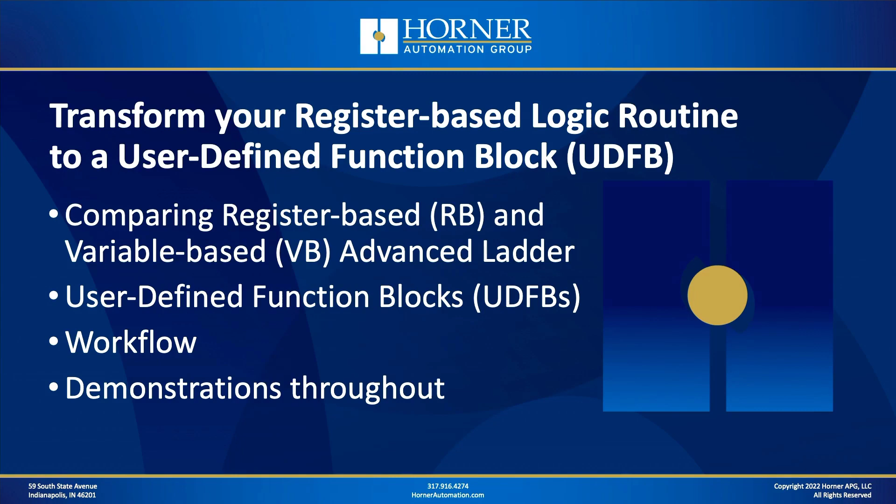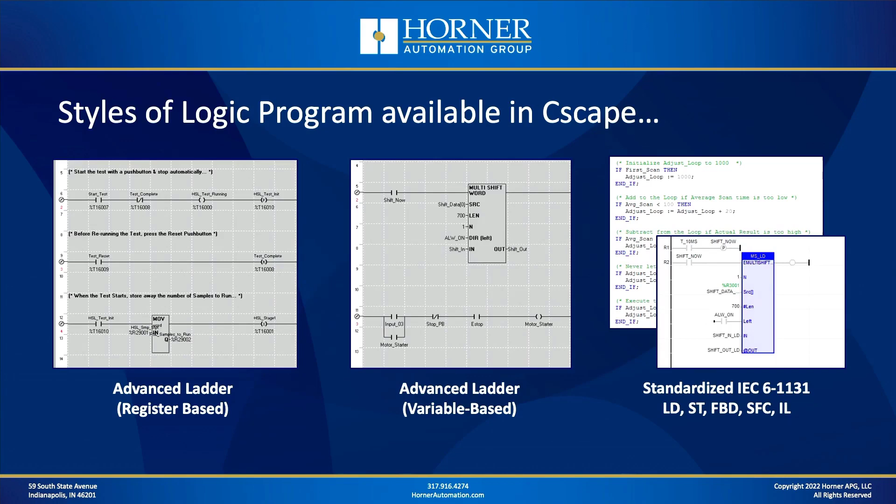In CScape, there are multiple styles of logic programming available. We have a couple different variations on our advanced ladder logic, which is kind of an American-style ladder logic. We've got register-based and we've got variable-based, and we'll compare and contrast those here in a second. But don't forget, we also support the IEC 61131 languages for those of you who prefer IEC 61131, and we've got plenty of videos on this channel showing you how to use IEC 61131. But today we're really honing in on American-style advanced ladder, as we call it. And we're going to really show you how to take some of that register-based logic you wrote before and reuse it again. So let's start with register-based advanced ladder.

Now, register-based advanced ladder was the original logic language available in CScape in 1998. And because of our installed base, it's still the most widely used style of CScape logic today. And we don't have any plans to obsolete it. Even though we're adding more modern options, we're not taking away the classic options that some people, frankly, still prefer.

There are some disadvantages to register-based advanced ladder, however, because with that language, it requires that all variables that you add to your program have to be mapped to a specific memory address in the program. And that makes it more labor-intensive when you are adding variables to your program. It also makes it more labor-intensive when you are replicating code because every time you copy and paste, you have to go into the pasted logic and readdress everything. It also doesn't support some of the newer features like the data structures and the user-defined function blocks, which we're covering today.

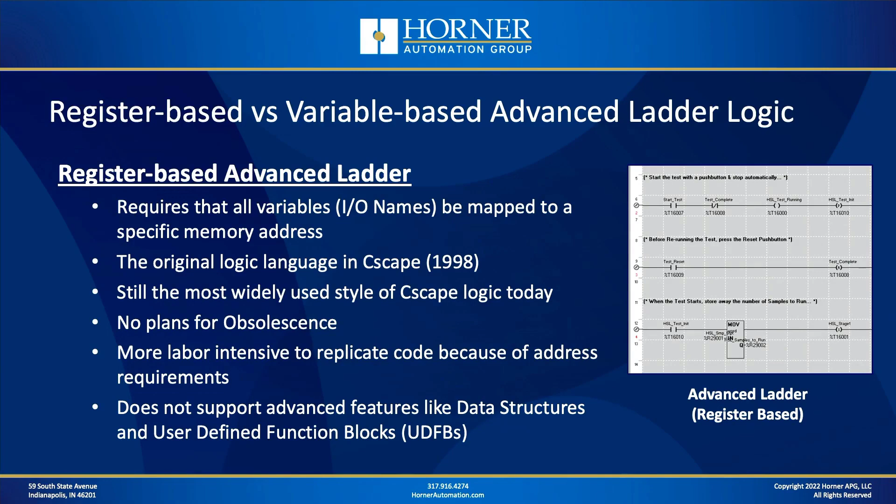Now, with variable-based advanced ladder, you don't have to map all your variables as you add them. You really typically only need to deal with a couple of them, and we'll talk about that here in a few minutes. You do get support for those advanced features. And in our training courses these days, we're teaching both variable-based and register-based kind of in the same course, side by side, if you will. Although in the advanced course, variable-based is pretty much the way that one is taught. And it's certainly the recommended approach for new users that are just getting familiar with CScape. If they're looking to use an American-style ladder logic, we encourage them to use the variable-based version for sure.

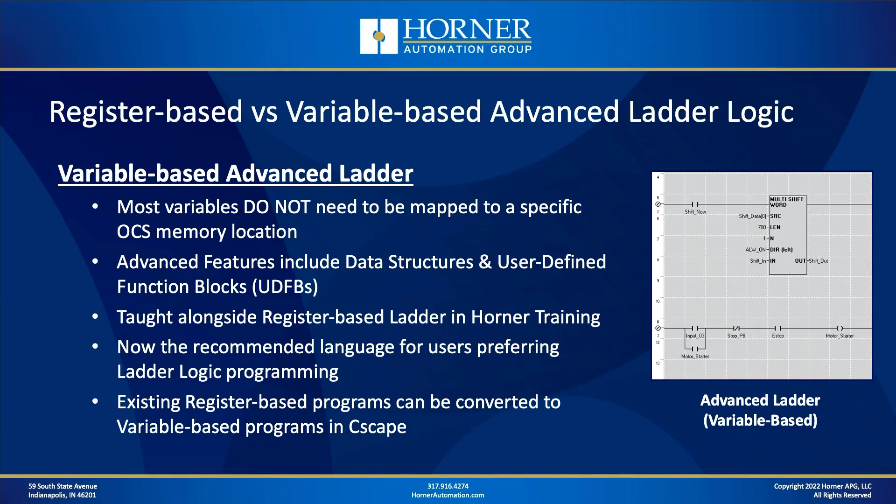But don't worry, if you're someone who's used the register-based for years and you want to reuse that code, entire programs of that code, you can convert your programs from register-based to variable-based. Okay, so there's the compare and contrast between the two. But let's take a quick look at memory mapping between the two, because certainly, like I mentioned a minute ago, with register-based advanced ladder, you have to memory map every single variable as you bring it in.

And with variable-based programming, you don't. Although, if you've got a real-world I/O point and you want to tie a variable to that real-world I/O point, that's a case in which you would memory map. Also, if you're going to send a variable out over a network like Modbus, for instance, you would memory map in that case as well. But those are the exceptions rather than the rule.

Now, the tools are a little bit different between register-based and variable-based when you're creating variables and when you're editing variables. Now, in both cases, you can create variables on the fly, or you can create them in advance. The tools are just a little bit different.

User-defined function blocks, which is what we're going to talk about today. These are sections of code that you can take and modularize and turn them into a function block that you can call similar to a subroutine, but really more like a function block. That's why it's called a user-defined function block. Unlike subroutines, with UDFBs, you can have multiple instances in the same program.

If you're using a subroutine, which are highly useful, you're going to have one copy of a given subroutine, and you can only call that subroutine once at a time. And it can't have multiple sections of code calling it and being in different areas of execution. That doesn't work that way. But with UDFBs, you do have the capability of having multiple instances of UDFBs in your logic simultaneously.

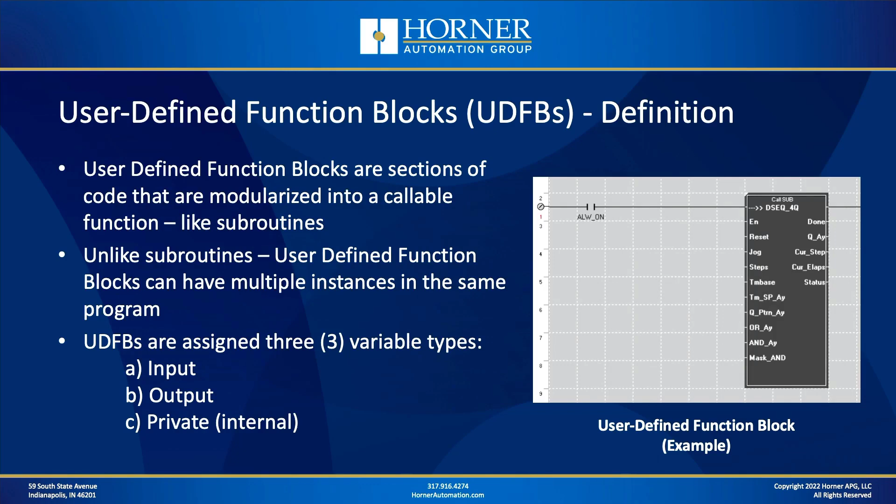Now, let me give you an example. Let's say you are going to create a user-defined function block to do some simple pump control, and you've got a dozen different pumps in your application. You create a single UDFB for pump control, and then you basically have a dozen different instances of that UDFB for each of your different pumps. So that is really useful. That's something you can't do with subroutines, because with UDFBs, each instance has its own set of variables, whereas that's definitely not the case with subroutines.

Lots of benefits to UDFBs, the ability to reuse your code very easily. It makes your programs more organized and easy to follow. Just tons of benefits, and that's why we're covering it today.

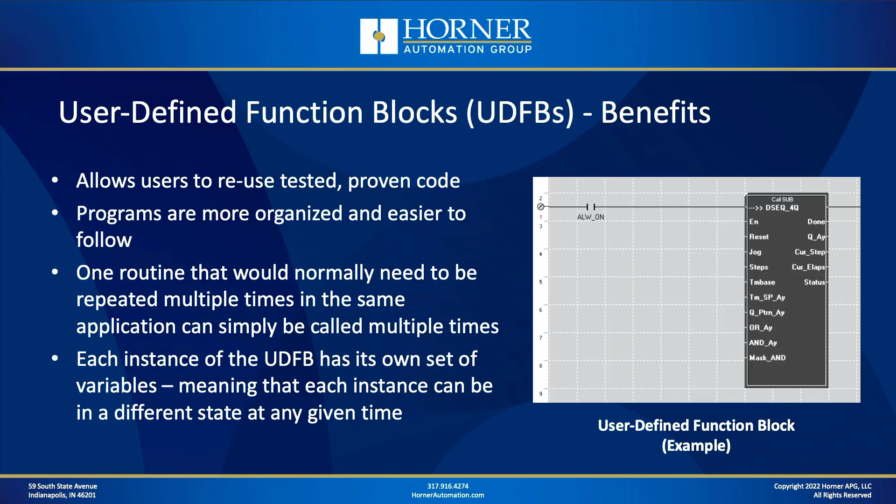Let's talk just for a minute. Actually, we're just going to show on the screen what our workflow would normally be to create a UDFB if we're starting from variable-based advanced ladder, and we just want to take some logic we've already written in variable-based advanced ladder and turn it into a UDFB. The procedure is there on the screen, and we have plenty of videos that tell you how to create a UDFB from scratch and those sorts of things. So I'm not going to cover this in a ton of detail.

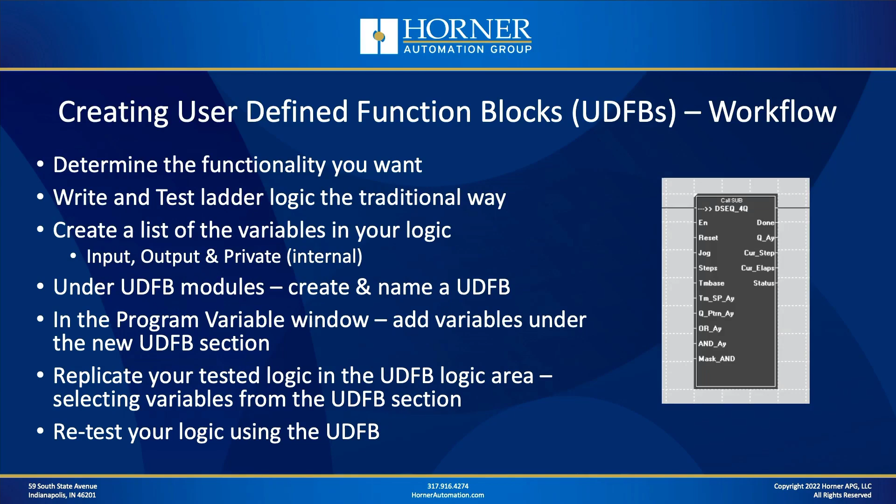What we are going to cover today in a lot of detail with tons of demonstrations is we're going to help you take a routine of logic that you may have written years ago using register-based logic, and we're going to help you turn that into a user-defined function block that you can use in a new variable-based program. So there's a lot of advantages to this approach that we're going to show you today.

First of all, I'm sure a lot of you that have been using Horner products for years and using register-based logic for years, you've probably got a lot of code you've already written and tested that works very well, and you'd like to reuse that if you can. And by reusing sections of logic instead of the whole program per se, the heavy lifting of code creation and testing has already been done. And by taking a section of code, it's fairly easy to turn that into a user-defined function block. So that's really what we're going to focus on today, primarily with demonstrations.

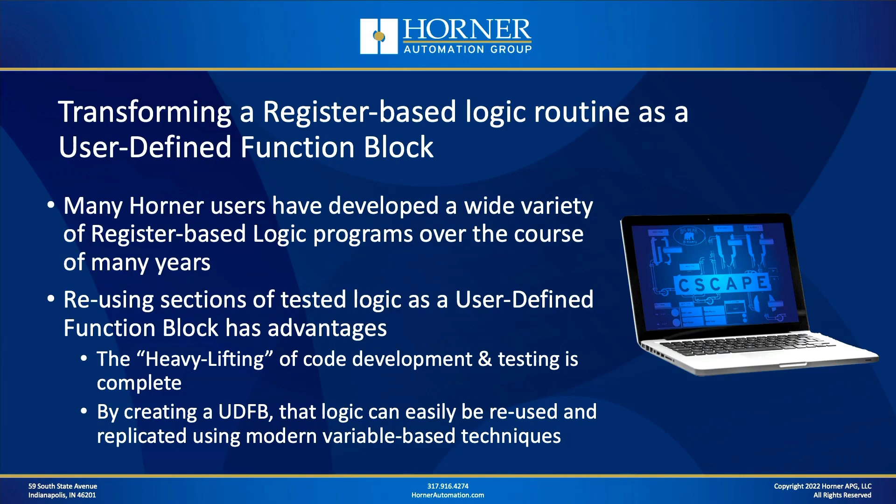So here's the workflow we're going to demonstrate. There's the steps there. Let's go through that real quickly, and then we'll show you in detail every step, and I can show you how I took a routine that I wrote years ago and turned it into a user-defined function block just earlier today, really. So we start by isolating the piece of the program that we want to turn into a UDFB. I mean, if we're converting an entire ladder logic program over to variable-based, we can do that, and we've shown you how to do that.

But today we're going to show you how to take a piece of code that you want to turn into a routine and how to isolate that and then make the conversion. So you're going to isolate that piece of code that you want to turn into a UDFB. You're going to go in and make sure it's documented the way you want. You're then going to convert that little snippet of code into a variable-based program on its own.

You're going to go in and get rid of any memory mapping that happens by default when you convert from register-based to variable-based, because we never use mapping when we're using or creating user-defined function blocks. We're going to identify the inputs, outputs, and private variables that we need to specify when we create our user-defined function block. We're going to create that user-defined function block, and then we're going to test it. Let's go ahead and demonstrate this workflow.

Now, what I did was I taped my demonstrations earlier today. Because this is a fairly extensive demonstration, I thought it would be easy just to kind of pre-record it. Everything went super well, frankly. I probably could have done it live, but just to save a little bit of time, I thought it would make sense to pre-record it because I could fast forward through a couple of the more tedious steps.

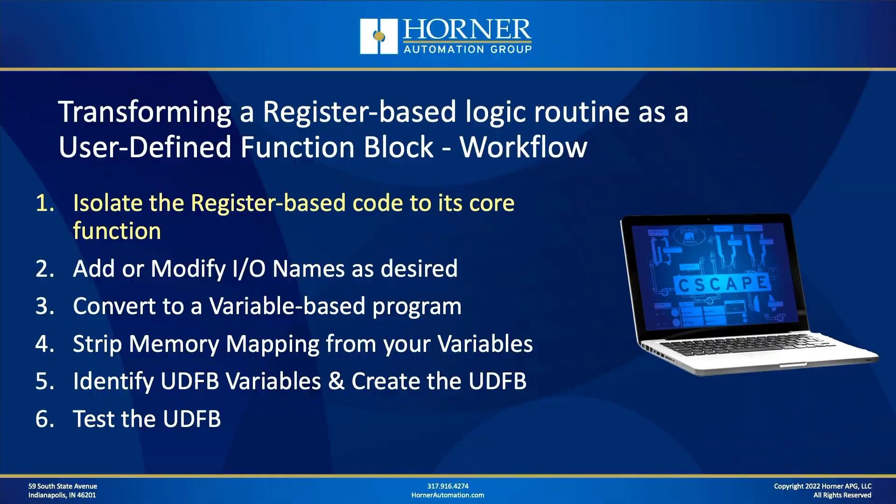So let's start into our workflow. Let's start with the first step, which is isolating the register-based code to its core function, and then I'm going to demonstrate just the core code, how it works in its current register-based form. So our first step is to isolate the code that we want to ultimately turn into a user-defined function block from whatever register-based program it was originally included in. And I've kind of done that already. So let me show you what I've done here.

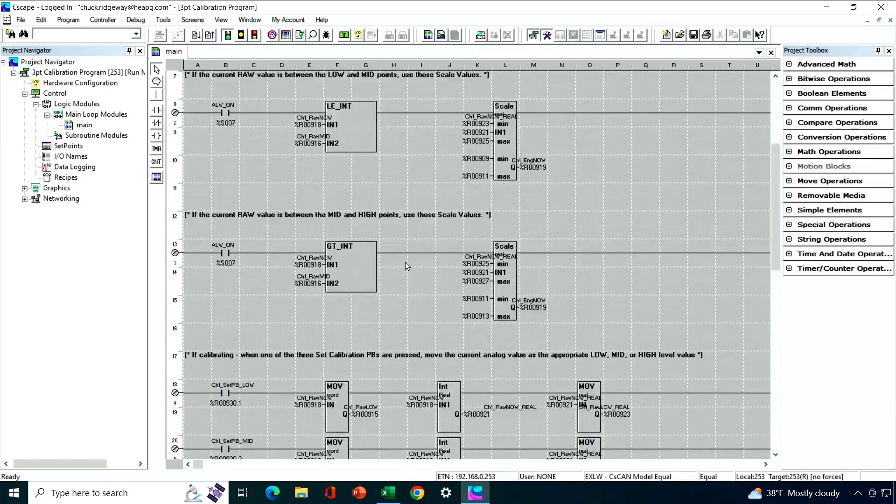So this is my application, which is performing a 3-point calibration while it also scales an analog input to engineering units. So here's my logic. It's only really a few rungs of logic, I would say about 30 lines of code or so. And you can see it's definitely register-based logic here. And then I have a companion screen or user interface, and you can kind of see how it's designed to work.

So the whole idea is that in the field, you would have a technician who would fill in the low, the middle, and the high levels that you want to calibrate to, and these would be in engineering units. So if I was controlling or monitoring the level of a well, this might be in meters or feet or inches or something like that. That would be engineering units here for a low, a medium, and a high level.

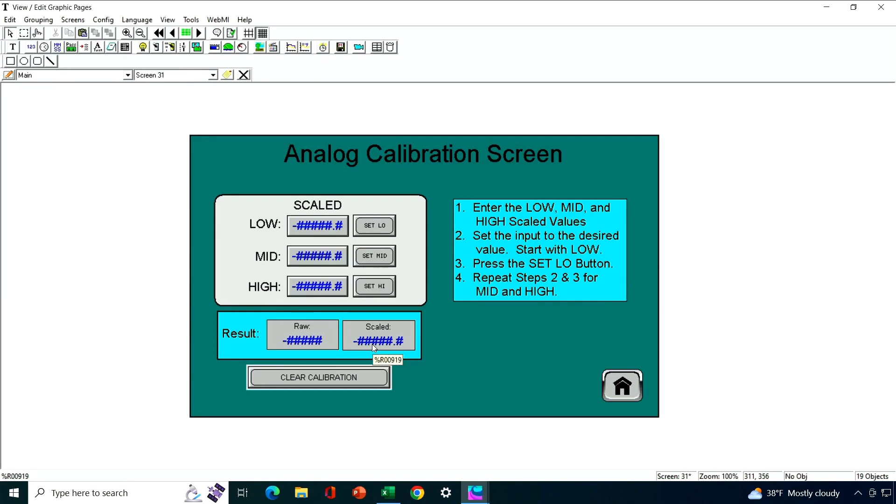And then during the calibration process, I'd be monitoring my raw analog input coming in. And after I was done setting my low, mid, and high levels, after I had done that calibration, my scaled value would show up here and I could verify the scaling was correct. So that's how my application works. Let's go ahead and download this. Although I think I've already downloaded it actually. Never mind. Let's just go on the bench and take a look and see how it's working.

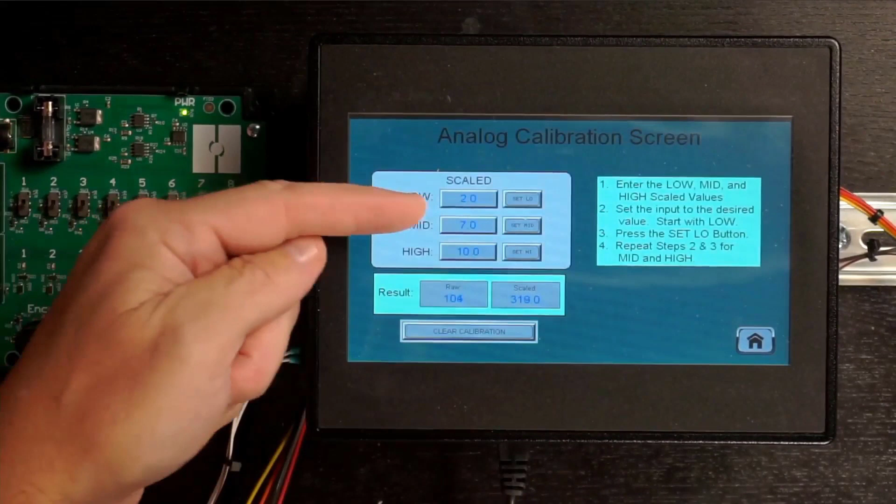So I'm going to go to the benchtop view. It's always important, of course, that you test any code that you're going to turn into a user-defined function block to make sure it's actually working before you turn it into that block, okay? So I'm going to use, let's say, 2 meters, 7 meters, and 10 meters for my well level here. Those are my engineering units. Those are inputs to my code. And then my current analog value is here.

So let's move the analog value up to what would theoretically be the 2 meter level. We'll hit set low calibration. We'll move up to what would theoretically be the 7 meter level, somewhere in that range, and we'll set that. Of course, in a real application, we would be taking much more care to get exactly to the level we want before we hit the set calibration button. All right, and now that we're done, we're getting the results we want. You can see our scaled value here is working just like we want.

So, okay, that's the application, the code that I've isolated that I'm going to turn into a user-defined function block. So let's take a look at the variables and the comments in our program and make sure we're happy with them. One thing you'll notice is that the IO names that were put in here originally reference specific channel numbers and that sort of thing.

They're also fairly long. When I'm creating variable names that ultimately will be used in UDFBs, I want them to be more generic and a little bit shorter if I can. I still want them to be descriptive, but a little bit shorter. So if we go to program IO names, and again, this is our original program with the isolated code, you can see these are the IO names I'm talking about here. And I think I'd like to rename these variables.

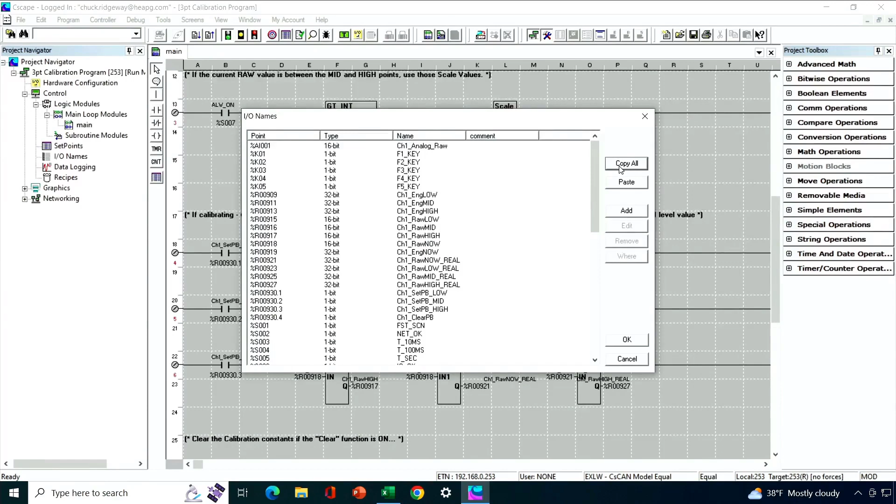You don't have to do this. This is a totally optional step, but I like to do that, just to make things a little bit more generic for a UDFB, and in some cases to shorten them down a little bit more. One of the things you can do in Cscape, of course, is copy all your variables and then paste them into Excel. I did that a little bit earlier. Let me show you my spreadsheet here.

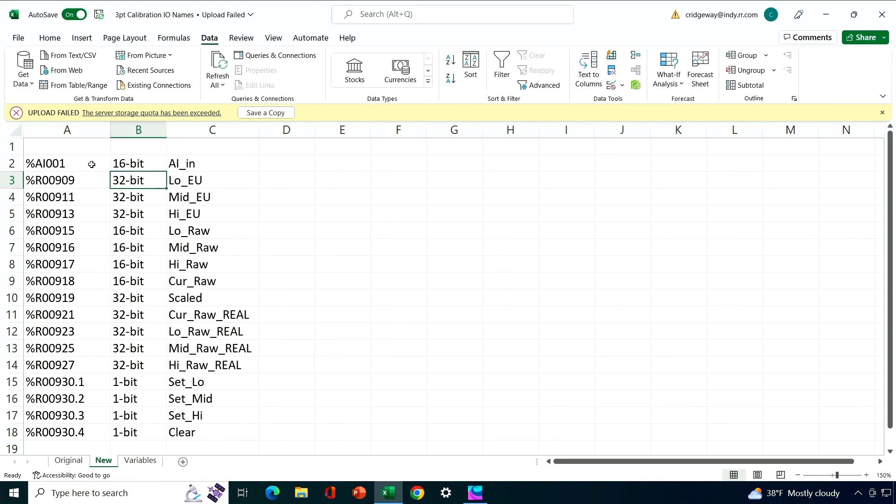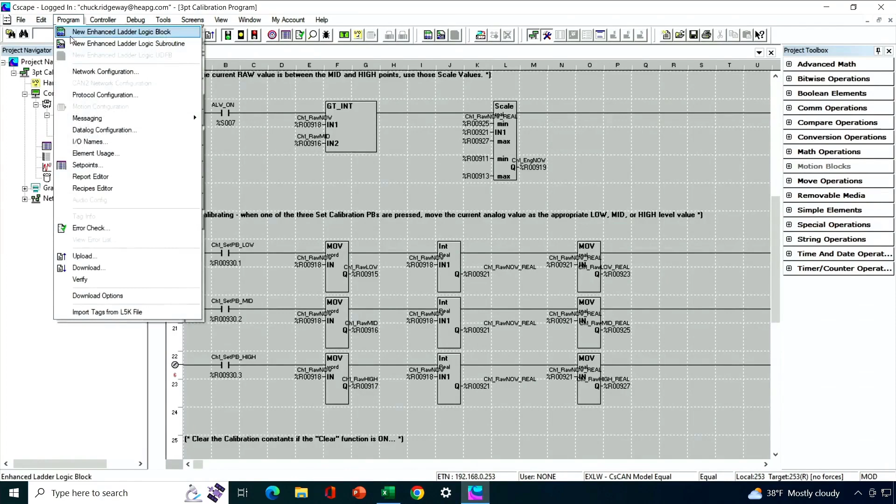So this is effectively the original variable names as they currently exist, or IO names as they're called, with register-based Cscape. And I figured out what new names I would prefer that might be better for a UDFB, and I created a new set of names here. Then I have the ability to copy these new names, go into Cscape, back to the program IO names area, and paste them in.

It asks me if that's what I want to do. And now I've got my new names in there. So again, this is a totally optional step, but in my case, I thought it was worthwhile to have somewhat shorter but still descriptive names for my IO names. So that was the next step that I completed.

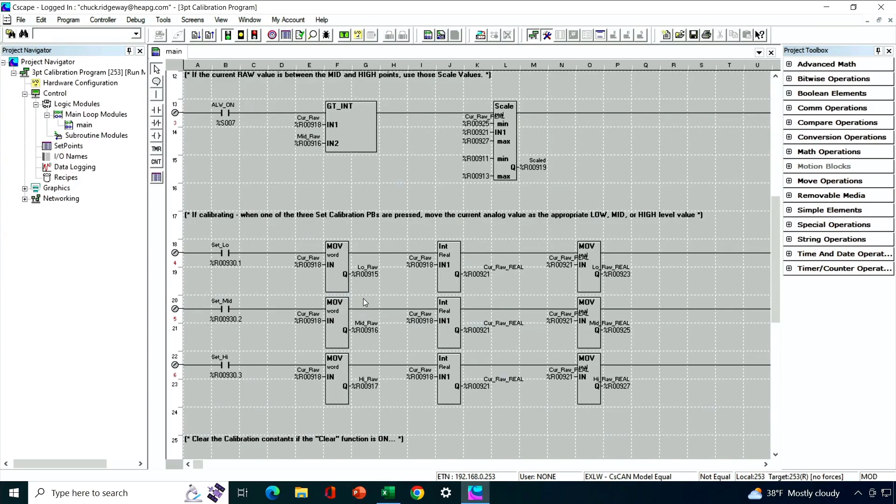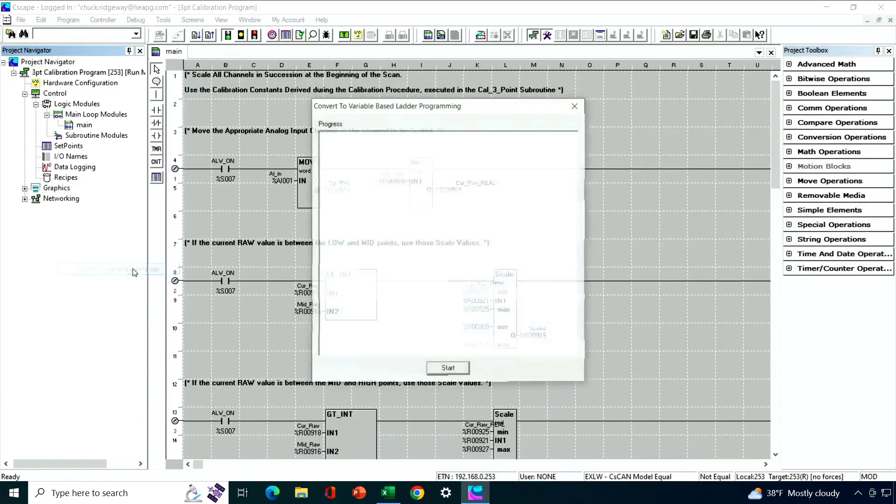The next step in our workflow is to convert this register-based logic over to variable-based. So let's go ahead and do that. It's pretty easy. We go over to the Project Navigator, highlight the name of the program, right-click and select Convert to Variable Based. We hit the Start button. It immediately prompts us for a new program name. Important to give it a new program name. Let's give it a new name. There we go. Hit save. It completes the conversion process.

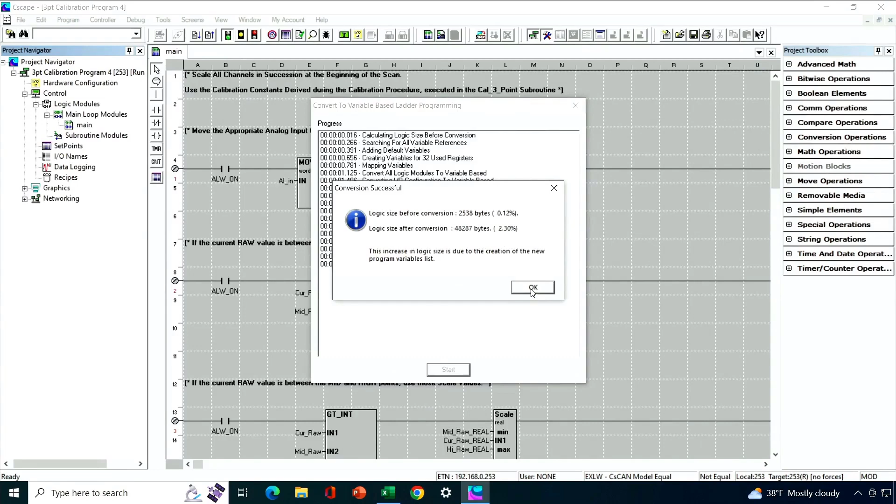Now don't panic, the size is going to be larger, but it's still not going to be a problem. It's still quite small. The extra size is due to the variables. At this stage, it's important that we go ahead and save, because we now have this variable-based program that we want to save, and that's it. So that's that part of the workflow.

Okay, next, we're going to strip off the memory mapping that is maintained when you convert from register-based to variable-based, because we won't need it anymore when we use this variable-based code. Now, in some scenarios, you want to leave that memory mapping there, but not when you are creating a user-defined function block. There's typically no reason to do that.

I'm actually going to close this program that I just saved, and then reopen it again. That way, all the options for a variable-based advanced ladder program, including the ability to create UDFBs, will be present, because Cscape knows that this is truly a variable-based advanced ladder program. So let's open up the program variable window. Remember, the program variable window is the tool we use to edit our variables in variable-based advanced ladder.

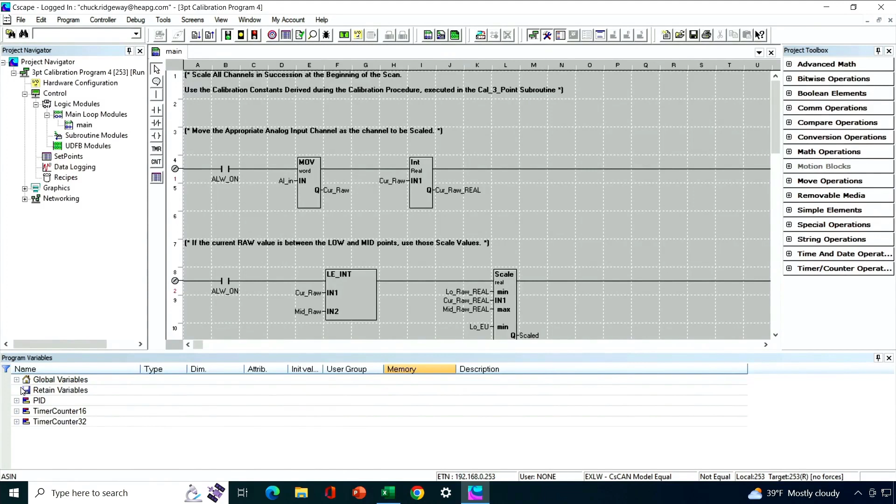So we can go under the global variables, and this is where we see the global variables that have been created, and you'll notice that when we get to here, we've got effectively the memory mapping, and that's what we're going to strip off, because we're not going to need that. So I'm going to double click on the memory column, hit backspace to clear it out, and enter.

And I'm going to do that on every one of these variables, and there's only a dozen or so, so it isn't going to take that long. But that's basically the next step in our workflow, and I'll just go ahead and complete this offline.

I'm starting with my new program here. I have converted it from register-based to variable-based, and I've already stripped off the memory mapping from all my variables that will be ultimately used in my user-defined function block. They're currently used here in main.

Okay, so the first thing I'm going to do is create the UDFB by going to UDFB modules, right-clicking, hit new UDFB, and I need to give it a name. I'm going to call it Cal_3pt. Should be a relatively short name, but descriptive enough. So the first thing I need to do is create the variables for my UDFB, because remember, UDFBs have their own variables.

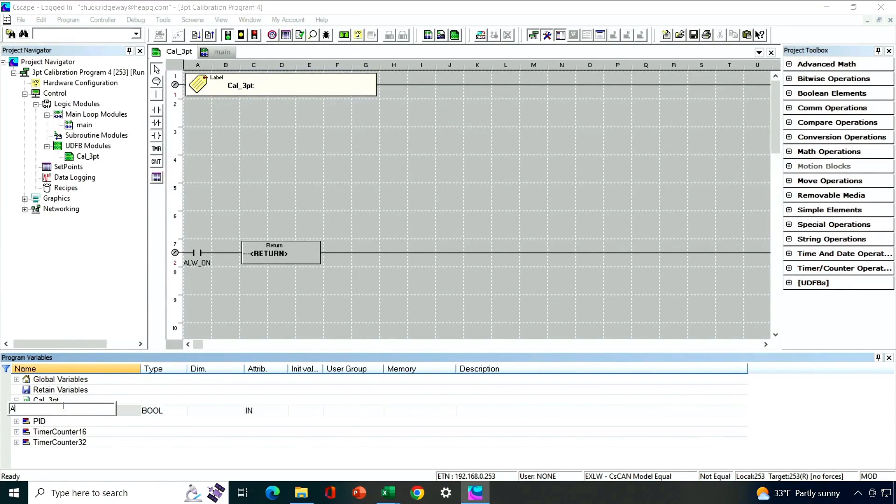I'll make it an input parameter, and I know that one of my inputs to my function block is going to be the AI in. That is an integer value. Let's add an output. And I know one of my output variables is my scaled output, which is a real variable. Okay, so I've added a couple the slow way, if you will.

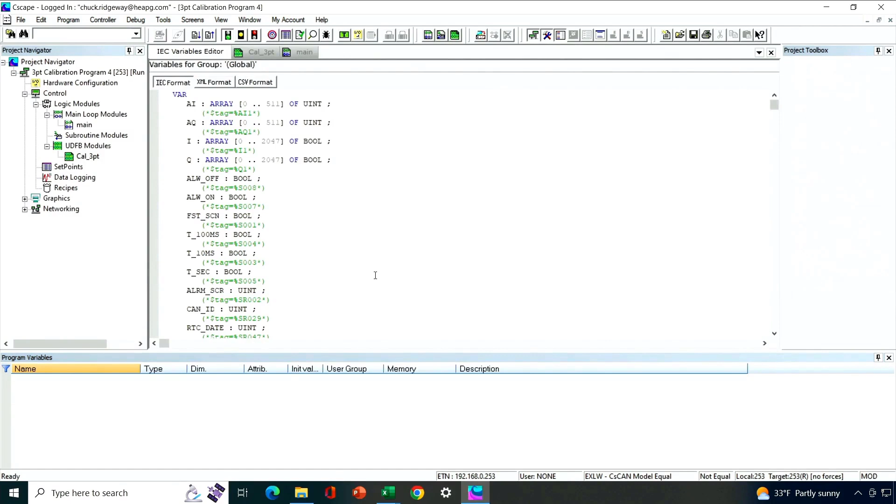I could add all the rest of my variables in this fashion, no problem, but I'm going to show you a shortcut. The first thing I'm going to do is go to my global variables. That's where all my variables that I created in my main loop that'll ultimately become UDFB logic are located. I'm going to right click and say edit variables as text. And then this allows me to scroll down and find that list of all the variables that ultimately are going to be in my UDFB.

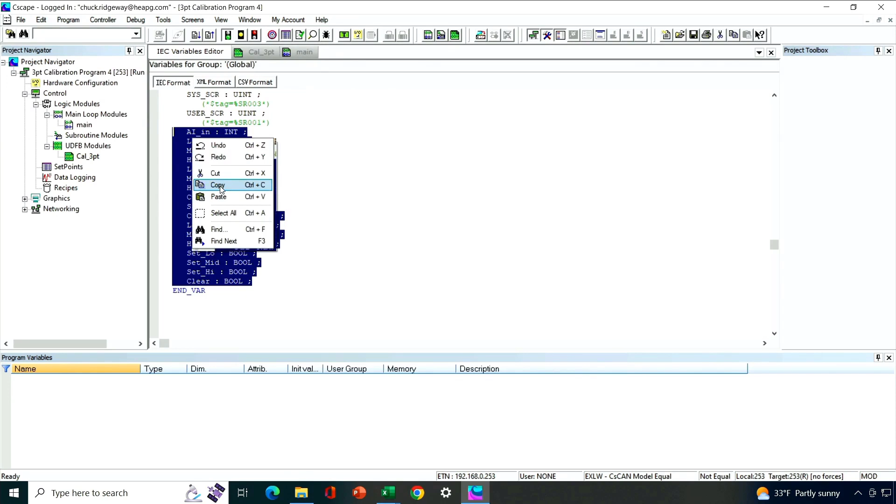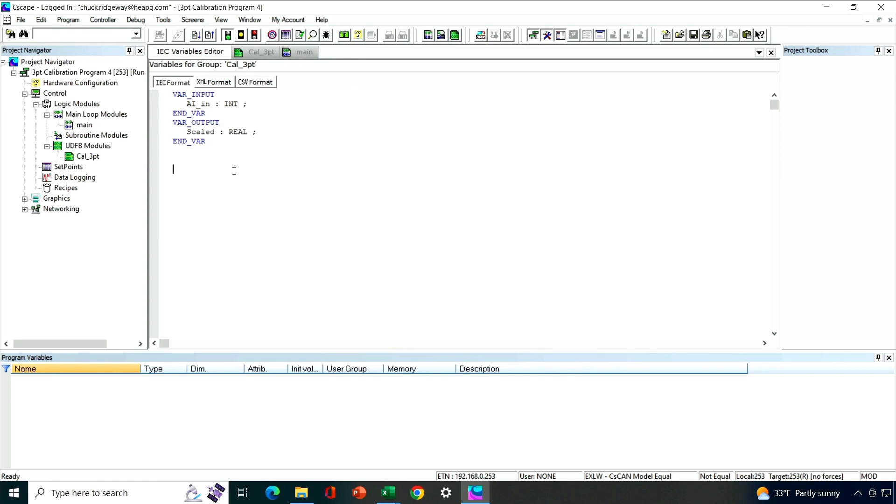So I'm going to copy those, and I'm going to close it here. And there were no changes made, so it doesn't prompt me to accept the changes. Now I'm going to go down here, right click, and say edit variables as text for my calibration variables. And the reason I put in an input and an output variable was to show you what the syntax looks like. And then I'm going to paste in all these variables that ultimately need to be classified here.

Now, the only thing I didn't put in was all the internal variables. So I need to add the syntax here for those. There we go. And I'll make room for those. Input variable, AI in, I've already done that one. I'll get rid of him. Low, mid, and high EU, those are my engineering units. Those are also input variables. These are all internals. I'm sorry, this one is an output. Let's go ahead and move him to the right section here. Oh, he's already there, so we're good there.

These are all internals. So I'll move those there. And these are basically inputs. Let's get those added to the input section. So I've got my inputs, my output, there's only one, and my internals. That's a shortcut for getting all those variables added. Because remember, I'm keeping the same names. That's why I can do that.

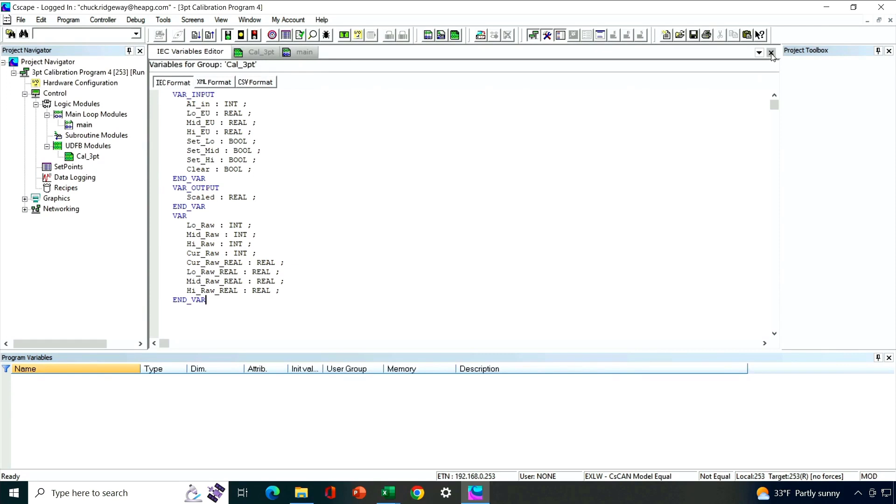Now it's prompting me that I've made changes. Do I want to keep the changes? And I do. So now I've got variables assigned to my Cal 3-point UDFB, and there they are. You can see they're all in there now when it's expanded.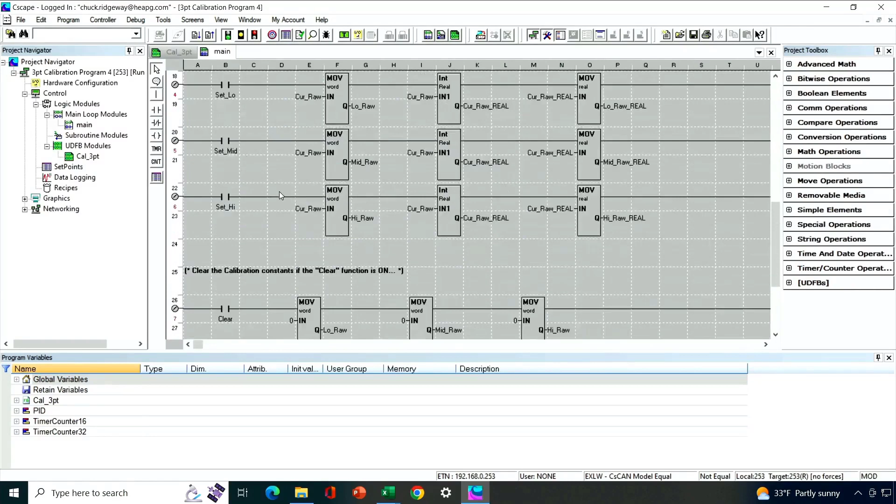Next thing I need to do is take all this code that I have currently in my main loop, and insert all that code into my UDFB loop. But I've got to have room to paste it in. And if we take a quick look here, I believe we've got about 30 lines of code. So we've got to make sure we have enough space for it. So I'll go back to my UDFB area. Let's go ahead and insert 10 lines, and then let's insert 20 lines. So that gives us plenty of room.

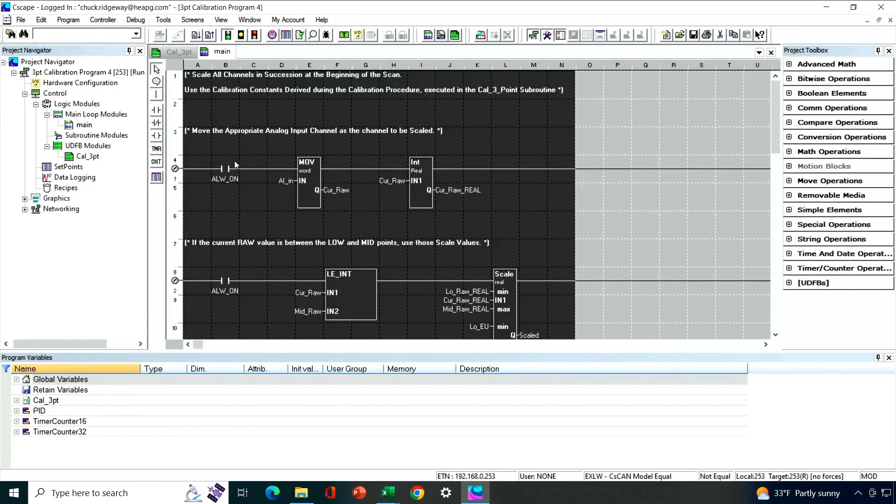Let's go back to our main code. I'm going to do a select all, which is Control A. Then I'm going to do a copy, which is Control C. I can also right click and say copy. Okay. I'm going to go to my Cal 3-point, right click and say paste, and then click where I want to paste it. Okay, that's all been added. That's good. So you might think that we're done.

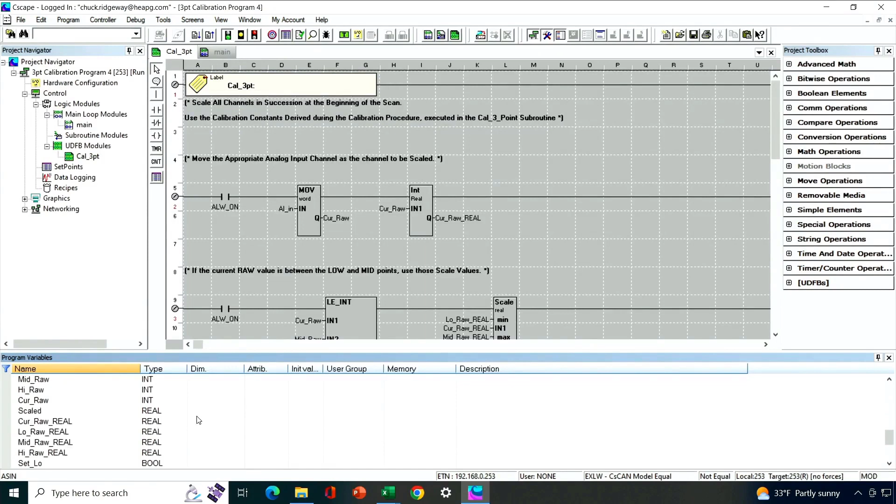Well, we're not done. The reason we're not done is because I've just pasted in code with all the variable names from my global area. See, they match 100%. Well, inside of a UDFB, every variable that is a UDFB variable has to have the prefix of the name of the UDFB. So let's go ahead and add that now.

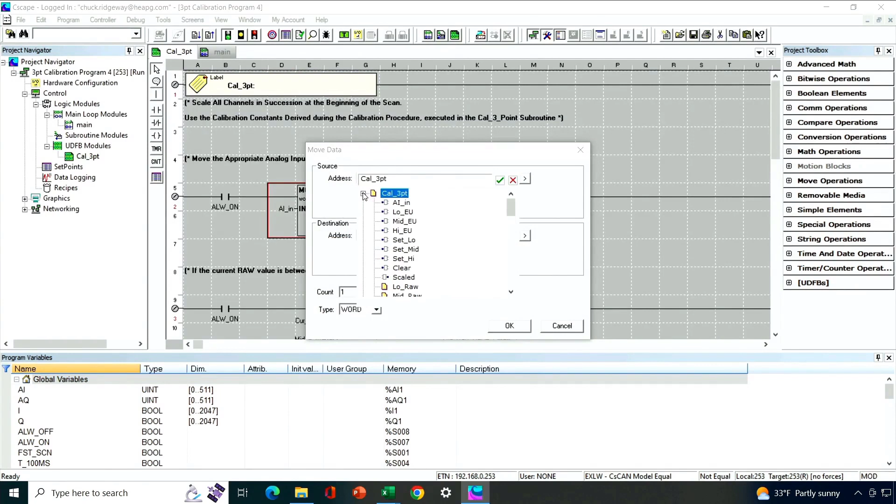This is another shortcut. I'm going to paste in the prefix on all these variable names. The first thing I'm going to do is select from the Cal 3-point group the AI in variable, and you can see it put a prefix on here. So now I'm going to copy that prefix, and I'm going to paste it with a Control V on every variable in here. Okay?

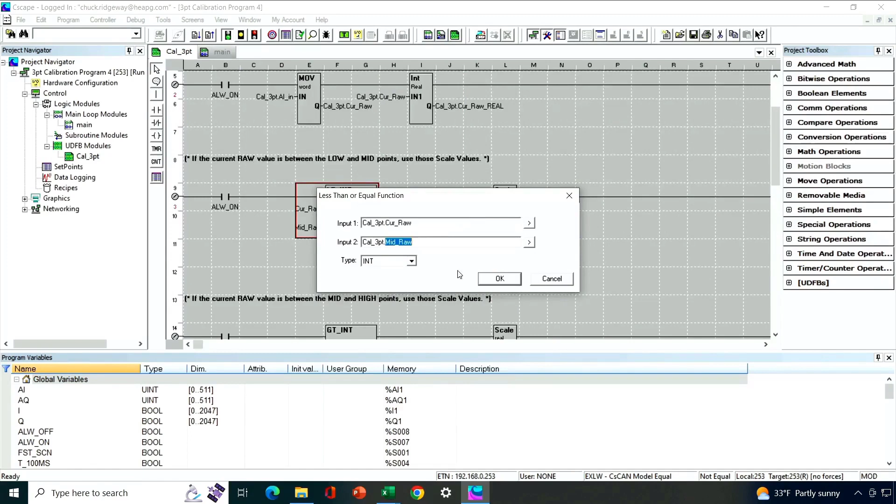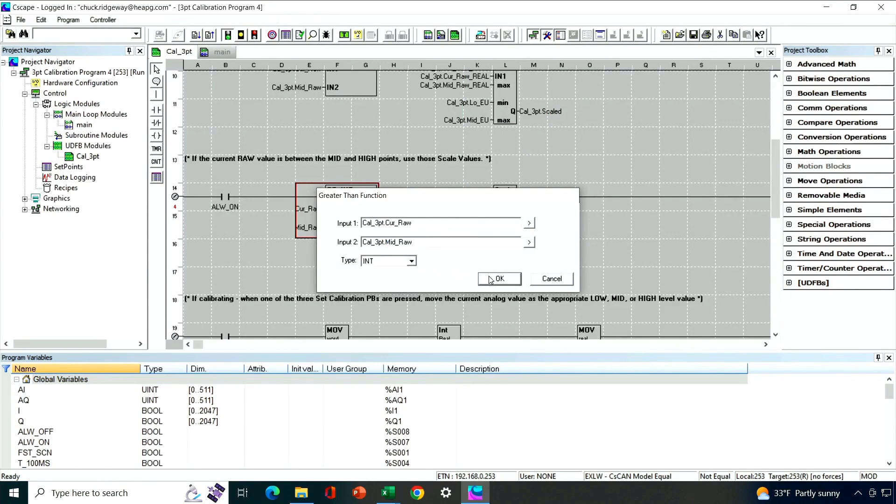Paste, paste. So I'm going into every function block under every variable that's using a UDFB variable, and I'm pasting that prefix on there with a Control V. Place my mouse, Control V. Place my mouse, Control V. All right, and this isn't going to take that long. I'm going to speed up the process so you don't have to watch me do this. But all total, this is going to take me well less than 5 minutes.

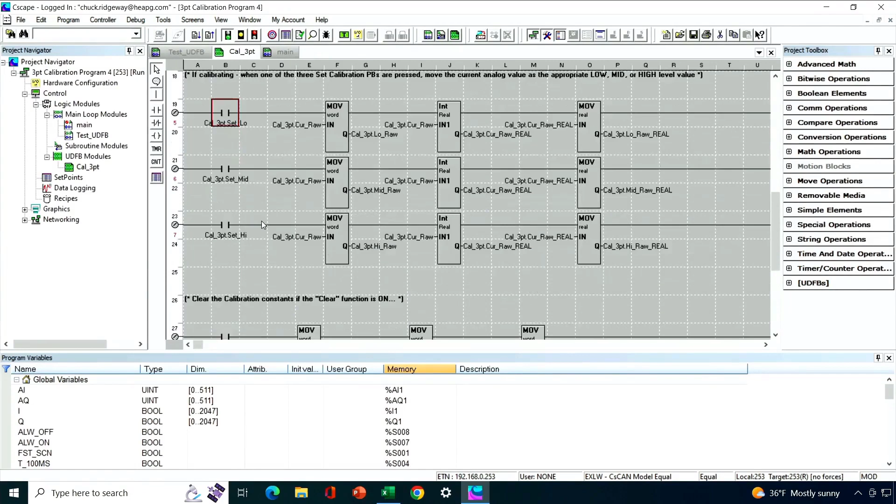Okay, that's done. That wasn't bad at all. All I had to do was go in and add that prefix to all the variables used in the UDFB that are UDFB variables. I didn't have to do it on things like always on. Those can just stay the same. But all the other variables, the ones that use the UDFB variables, need to have that prefix. Took less than 3 minutes. I now have logic in my UDFB using the proper variables.

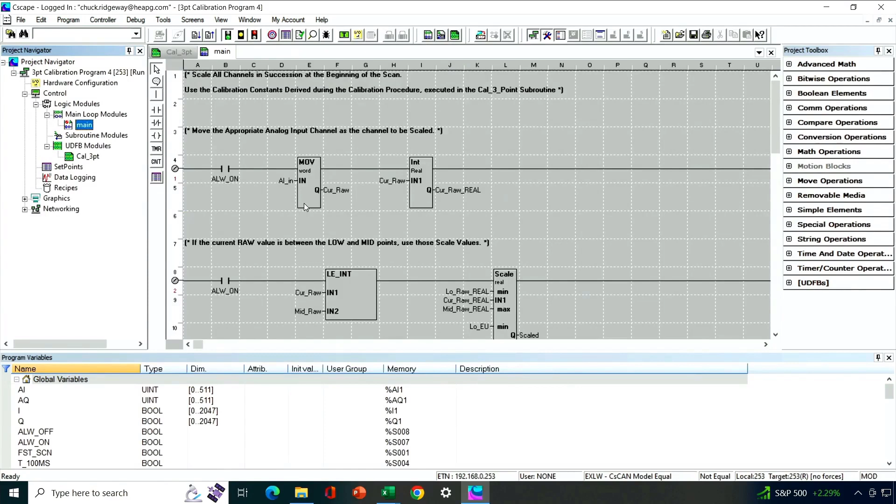Now I need to test this. So here's another little trick. I'm going to go to my main loop, which has the original logic in it, and I don't want this to execute. So I'm going to right click and say exclude from compilation. Now this original main routine isn't going to execute when I run my program, but I'm going to create a new main loop module, and I'm going to call it test UDFB, just to give it a logical name. Now we're going to build logic using the UDFB and make sure everything works properly.

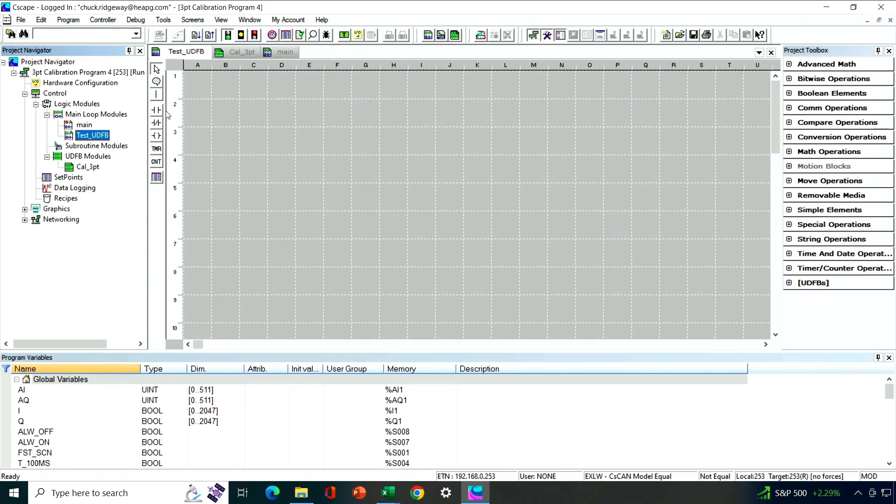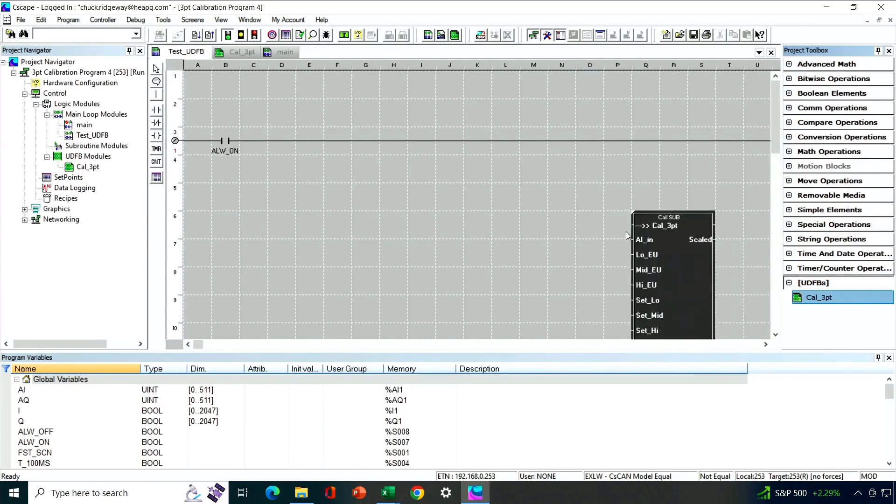I'm going to use an always on contact, and I'm going to call an instance of my UDFB. Now, where do I find that? If I go to my project toolbox, I can see there's a section called UDFB at the bottom, and my Cal 3-point UDFB is listed there. So I can drop it down. Now it's going to ask me to name it, and I can give it whatever name I want.

Let's just call it Channel 1 Cal. Well, let's do something a little more descriptive than that. Let's say this is the level of a tank, which is what our example has been. So let's call it level Cal. So now it's given me the label up there. Now I need to fill in all the input variables and output variables for my UDFB.

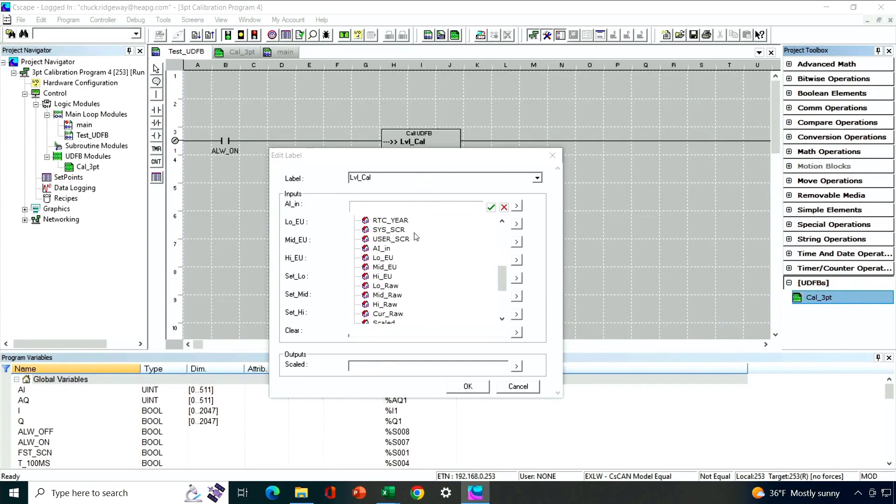Now, with the way I've done this creation workflow, I already have global variables with these exact names that I can use as my inputs and outputs for my user-defined function block. So I'm just going to choose those. I can choose them from the list, or I can just type them in. Shouldn't take me too long.

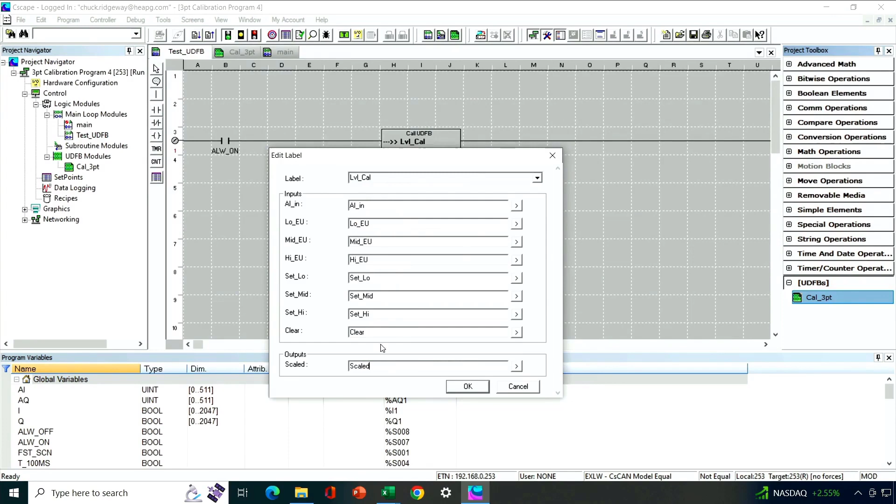Okay, if I've typed them in properly, they already exist in my global list, so it should just take them. And it did. If it would have asked me if I wanted to create a new variable, that's probably a clue that I typed in something wrong, but I didn't, so everything looks good. Okay, so here is my user-defined function block. To test this, I should be able just to download this to my controller.

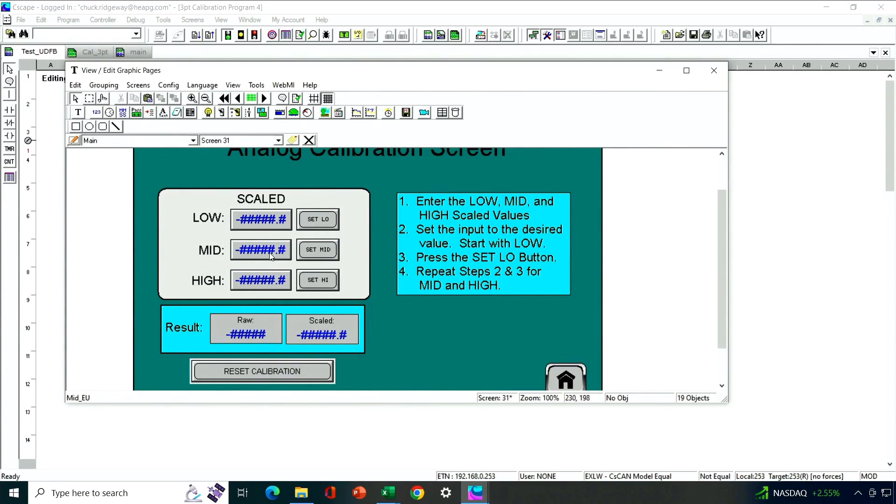Now, you may wonder about the screen here. Let's take a look at my screen. Well, because I use the same variable names that are already defined in my global variable list, and they were already used on this screen that I created, I don't have to make any changes here either. So those are ready to go. So basically, I'm now ready to download and test this user-defined function block.

All right, let's go ahead and do the test now. So a couple of things. One thing I don't want to forget is that this AI_in variable here, if I'm going to actually test it on my bench, it needs to actually be mapped to one of my analog inputs in my system, or in my I/O simulator, in my case on the bench.

So down here in my global variables list, this AI_in variable that I have assigned to my UDFB here, I went ahead and added a memory mapping entry for %AI1. So that way we are getting direct correlation between the analog input coming in and this particular variable.

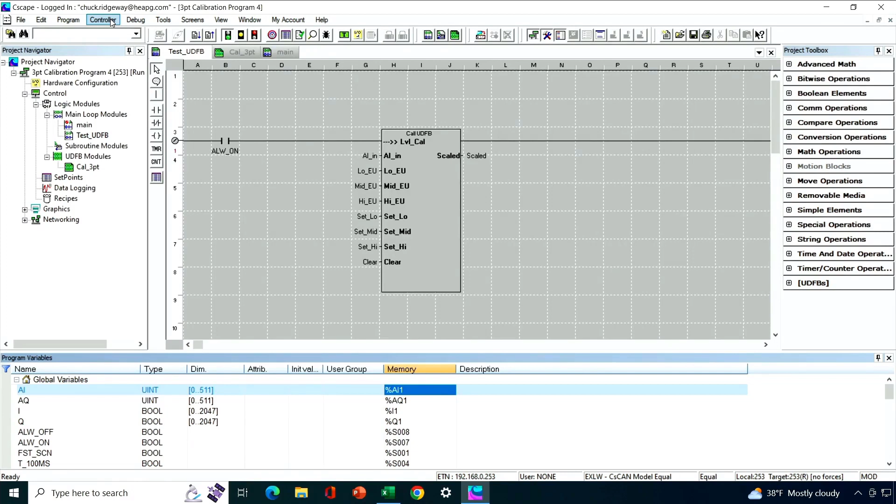The other thing I like to do when I make a significant change to a variable-based program like I'm doing here is sometimes I like to actually clear the memory in the controller before I download the new program. That way we can be sure we have a fresh start, there won't be any old variable values or anything like that.

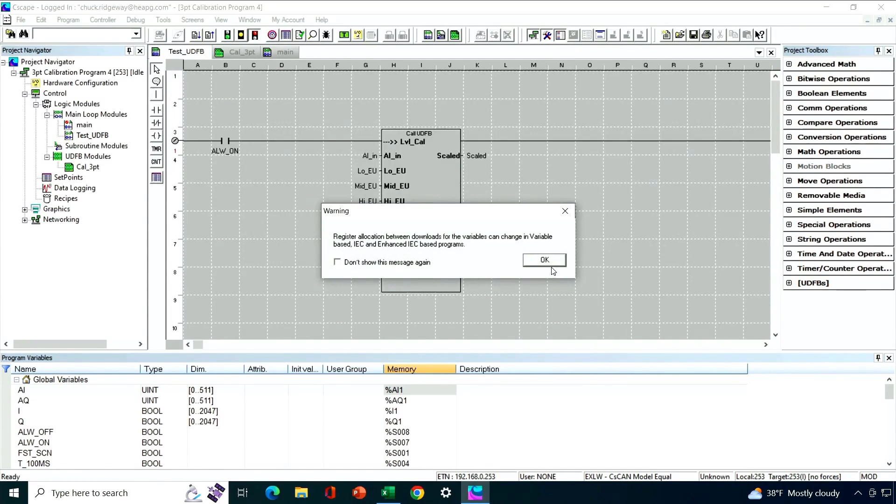So under controller, clear memory, this is one of the ways I can do it. I'm going to go ahead and clear my program and my register and variable values. It reminds me that it's going to stop the controller when it does this clear. So now my controller is stopped. I'll go ahead and do the download.

And then I have to remember to restart my controller once that download is complete. Not quite there yet. Getting close though. Okay, download is complete. Let's go ahead and restart the controller. And let's head to the benchtop view.

So let's set our low, mid, and high engineering units. We've been using 2 for low, 7 for the mid value, and 10 for our high value. We are getting a value here for our raw input because we did map it to our first analog input. I'll set it up here to what we're calling our 2 meter level. So that's our low calibration point.

I'll set it up higher to approximately what I'm going to call the 7 meter level. Of course, in a real application, I'd be very sure it was exactly 7 meters. And then let's go up to what I'm going to call, for the purposes of this demonstration, the 10 meter level. And now we can look at this value, and as our level goes down and our analog signal goes down, you can see our analog scaling is doing exactly what we want.

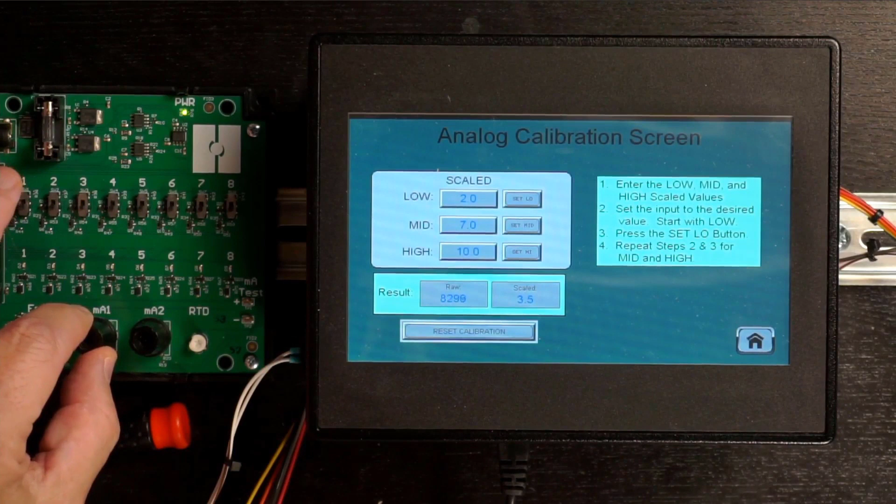And we've effectively calibrated our analog input with a 3-point calibration method, and at the same time, we scaled it to engineering units. So that's complete. I would do a little bit of extra testing here on my UDFB just to wrap it up and make sure everything is exactly as I want.

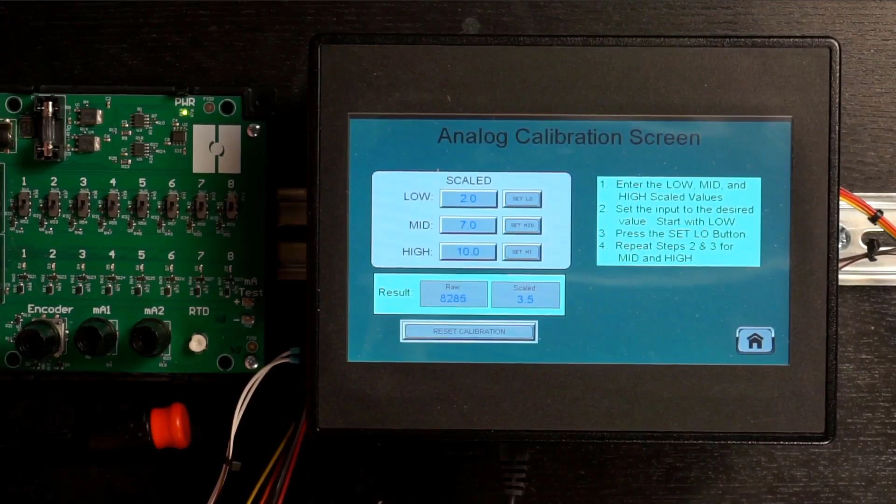Okay, now we have one last step I want to show you after we have completely finished and tested our UDFB, and that is I'm going to export this UDFB so that I can use it in future projects. So I highlight it here, right click and say export. It asks if I want to export the module fully protected.

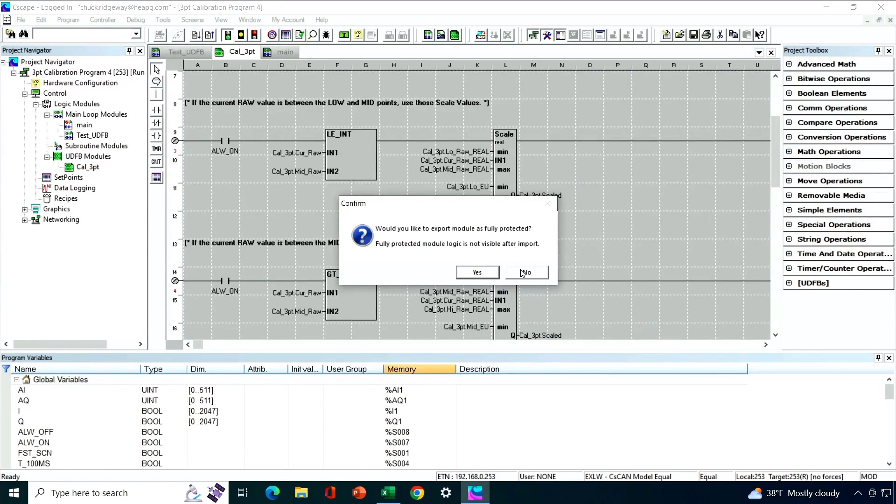I would recommend that you don't do that unless you are at the point where you don't want your user or whoever's using this UDFB to see the logic inside. So I'm going to say no, which means I'll be able to see the logic inside.

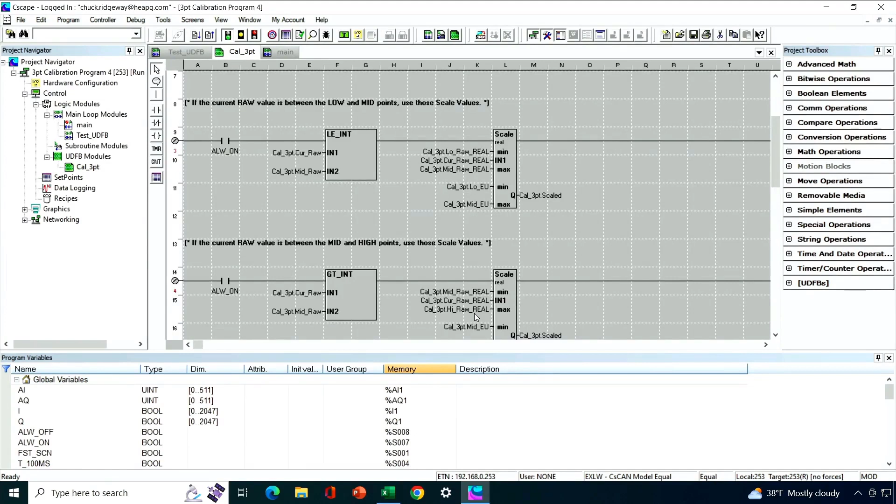I'm going to go ahead and give it the same name, Cal 3-point. It'll have an extension of CPU. I'll hit save. And now, the next time I have a new variable base advanced ladder project and I want to use that 3-point calibration method, I can just import that UDFB into my project, and then I have the availability of using that with multiple instances within that project. So if I have 4 analog inputs, I can have 4 instances of that UDFB, and it's just nice and easy to use. So that wraps up our demo.

I know we said we were done with demos for today, but I want to show precisely how you import a UDFB into a project. So I'm going to create a new variable base advanced ladder program. It could be an existing one. It doesn't have to be a brand new one. I'm going to import that UDFB into this program because I want to actually use it. So I go under logic modules. I hit right click, import logic modules.

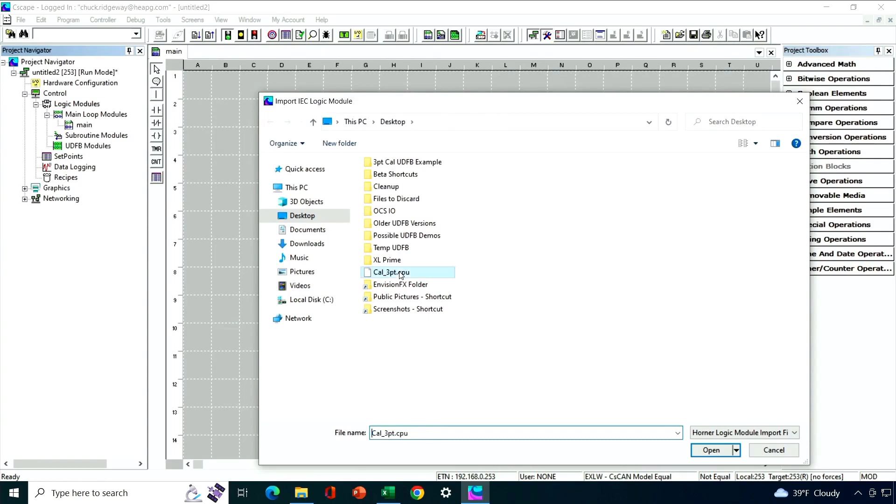I go to the folder that contains the CPU file. I hit star.cpu so that Cscape can find the file. There it is. All right, I hit open. It's showing me the contents of the UDFB because of the fact I didn't protect it when I exported it. And now in my main loop or any other main logic module, I can go ahead and find that UDFB under the UDFB area of the toolbox, and I can place it in my project, name it, and use it just like I would anytime. Okay, so that is our final demo for today.

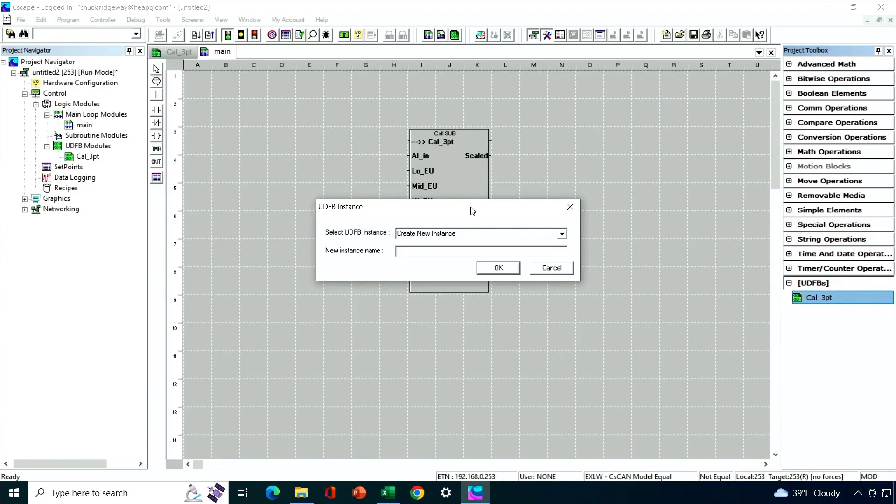All right, so hopefully you found that demonstration useful. I think any of us who have been working with register-based logic for a long time have a collection of programs and routines that we'd like to be able to reuse. It looked like quite an involved process. I tried to be very detailed, so it's really not as bad as it looks. I just wanted to show every possible detail and give you some hints on how you can kind of streamline your process and make sure everything goes super smoothly.

So as a wrap up for today, as we've mentioned many times in this channel, user-defined function blocks are just an amazing feature that you really want to take advantage of moving forward, whether you're talking about variable base advanced ladder or whether you're talking about the IEC 61131 programming languages. It's available in any variable based language in Cscape. And just because you've got a piece of code that was written originally in register-based advanced ladder doesn't mean that you can't turn a piece of that code into a user-defined function block, and we showed you how to do that specifically.